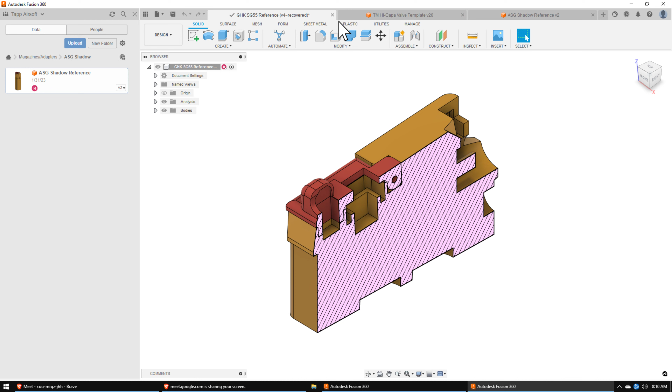Right now, even on a per-project basis, it costs a lot. This way we can work together longer - I'll have the security of being involved longer, and you'll have the convenience of not having to pay as much. I agree, I think it's a really good idea. I'm going to definitely talk with my brother about it.

Okay, great, let's go through this. How about I just model this and talk about it while I turn it into an adapter. Sounds great.

By the way, do you have Fusion or do you use SolidWorks mainly? I mainly use SolidWorks, but I've been tinkering with Fusion since I started working with you. Due to my thesis, I haven't had the chance to properly learn Fusion yet, but I'm thinking of learning it down the line. Maybe if we did this business venture, we could cover a license so you could use Fusion and join our account - we work with a couple of guys that would be great. Having licensing in my country is fairly difficult, we have to go through a number of different vendors to get one. I can work with the hobby license, but I don't think it will be powerful enough. What do you think - is it powerful enough for our line of work? For what you and I will be doing, I think so. We'll have to try it and see, and you just let me know if certain features I'm talking about aren't available down the line, but we can figure that out later.

The first thing I start with is we just have a body, and I like to label these. I use a tool where I format the names so that when they go into the printer, they're easy to read, because I don't get a lot of space. So I usually do the brand, then the mag, and then what type of adapter I'm making. I'm going to make our version, which is called a modular adapter, so I'll name that MA. And you already made these single stack, I believe, so I'm just going to name these ASG Shadow FL.

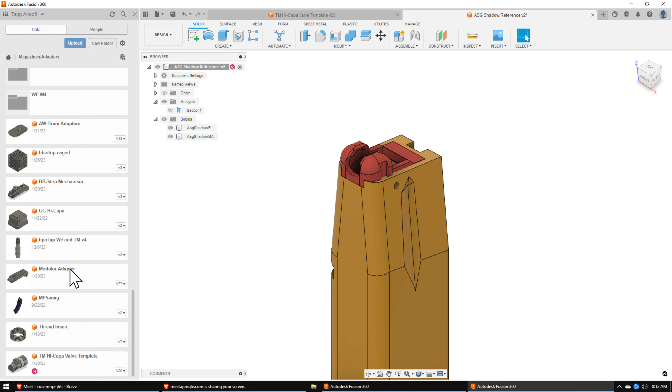This modular base comes from this piece here. Okay, I shouldn't have started with that, let me go chop this model in half. Okay, and now this is the valve template.

I think we talked about that at one point. Yes, and you modeled it already. Yep, I'm constantly updating these things as I realize stuff, like the printer needs change. It's an evolutionary process, going back through these models to update them because some of them are still using the old basis. That sounds like my kind of work too. Yes, it does indeed.

Okay, let's see. So all I'm doing here is inserting that template, and then I'm going to...

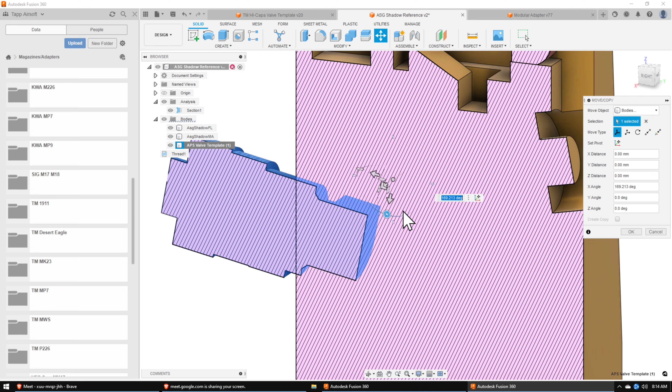Did you take classes on how to model and stuff, or are you self-taught? We did have classes, but our versions of software were fairly old, like we used to learn Pro Engineer 5.0, which is like two decades old software. So I learned SolidWorks and everything else on my own. That's why I'm confident I can learn any software if I put my mind to it. I believe you can too. Yeah, they're also all fairly simple.

So I'm matching the assembly angle, and then I can see that inside it's pretty much inside all the cuts, so then I can cut this out without much issue, and get rid of that little thing.

So there's that template, and then this square here is my output tab, and this is the output tab that you created. So I'm going to bind these two together, bring this up, and then I'm going to loft these. Doesn't that look a lot like this one? Yep, and so then that's my airflow.

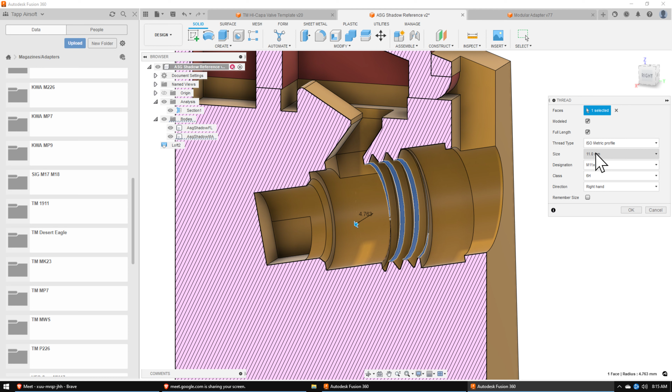And this thread here is 11 by 1. And then we also get rid of this back here. There, okay, so now I see I've got the internals for the magazine, and those are the internals that I want.

So basically, when you said you wanted the little thing on the back, it was mainly for positioning and angle of the template. Correct, and you've done a pretty good job of positioning those very well. Thanks a lot. All right, and so now I'm going to build the expansion chamber because we need a lot of air in here.

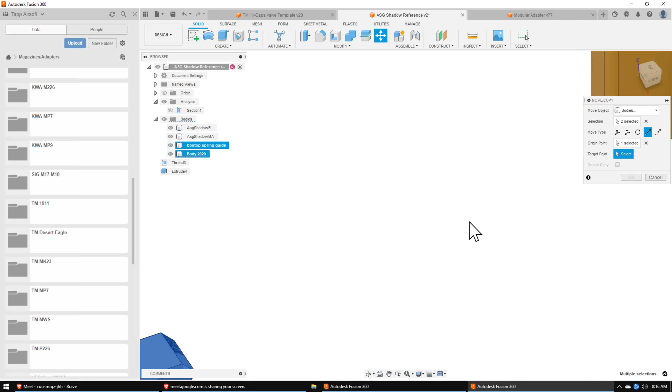So before I build the expansion chamber, I need to build where the BBs go - that's the other aspect of it. I'll take this piece and this piece, copy that, put that in here. These are also custom made for every other mag, they have to fit it. So you have to cut something from this one right now.

One sec, my cat is crying.

Sorry about that, I'm back. Sure, yeah. So as I was saying, I'm pretty much done with my thesis, I just have to present these things. I have the presentation ready as well, so I think I'll be ready not this week, but the next week. I think we can totally start with fusion and everything like that, and then that will give me enough time to talk to my people as well. Yes, exactly, so that will be very helpful, beneficial to both of us if you think about it. Yes, I agree.

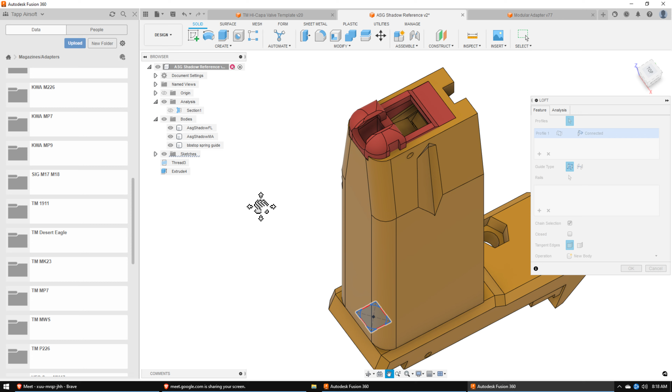Okay, so this piece - that's where the BBs are coming in, and then I'm creating a loft to where the BBs are coming out, and that's that little square that you made. So now we've got the tube that the BBs go through.

Then I like to add in a little piece on the front here - some styling, I guess. Well, it's actually sort of helpful because I'm using it so that I can remove powder on the print.

SLS printing is messy, so this is helpful to have. I like to punch a little bit out so that when we're sandblasting, the sand can get in there and really clean it up. That's beneficial on multiple fronts.

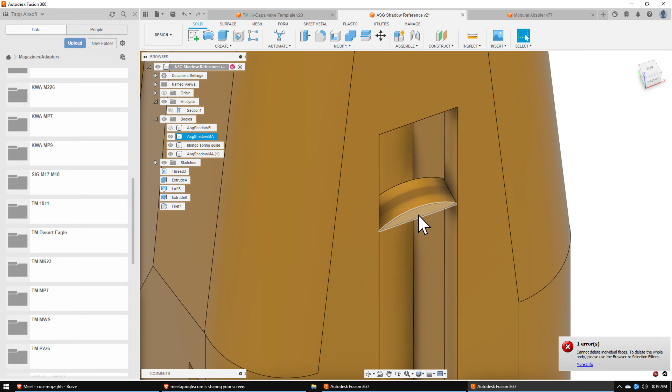I also like to add the fillets. The dimensions aren't super locked in anywhere important - the BBs will just go through it without an issue. It just needs to be at least 6.5, just as long as this space here is less than 6, so that the BBs don't come out the front.

I'm not sure why it's giving me this odd shape here. Whatever, we'll deal with that later. I did notice I'm getting a weird cutout, and that's because this whole piece comes so deep - it's a good thing I saw this. So what I'm going to do is try to shift the whole thing forward.

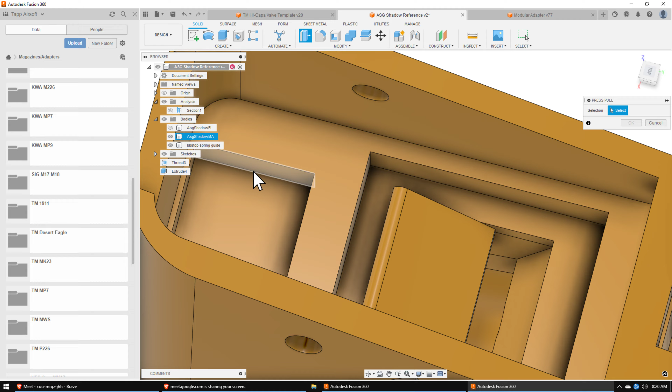Thankfully we can do that because of the way the feed lips are set up. Because we have control over the feed lips, we can control everything else. So you tweak the geometry a little bit - mainly the inside is what we'll mess with a lot, so that we can get what we want.

I also want to say the scans sometimes don't make a lot of sense. Like the recent piece I did - the geometry was basically for mating purposes. The scan was asking for a thinner feature, but this one here was a thicker feature, so I made it suitable for mating instead. That's super helpful, because assembly matters, and scans sometimes create unnecessary issues.

Okay, good, you're already working through that. So I'm going to loft this again.

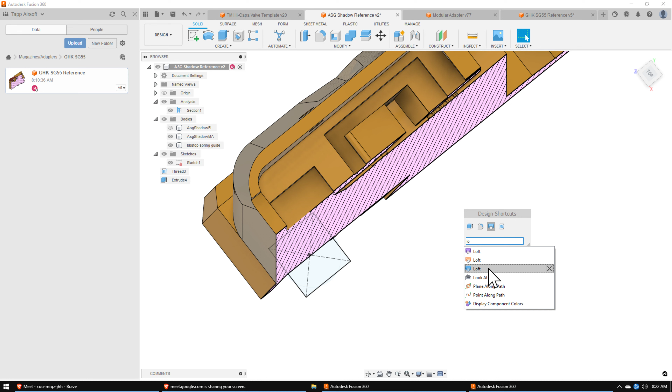I have tried lofting the circle to a square like this down here, but it comes out so much better when I've got a full square going all the way up. A circle is fine, but any other shape creates weird results - the loft guide curves get messy. A squircle gets really messy. I tried a squircle once and it didn't go well.

It looks like we were able to clear this little area here, but that material is so thin that it will mostly just get destroyed in printing. So what I can do to change that is fudge this a little bit, and I'm going to measure that exactly. I'm also going to pull this out so that it still might be too thin, but I'm going to print anyway just to see what I can get away with.

Because we're still testing everything, really. This printer is so new we don't even know what it's fully capable of, what our tolerances can be, and stuff like that.

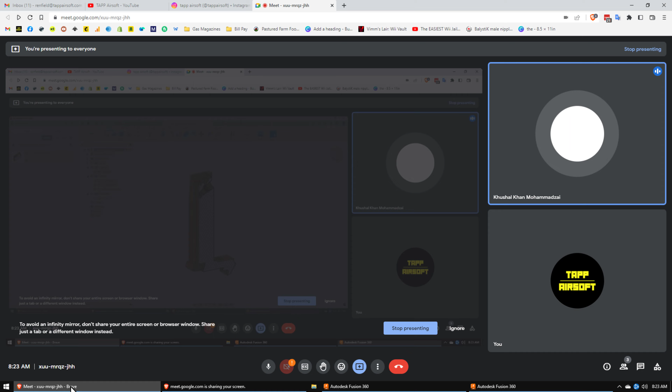What's its minimum layer thickness? I think ours was 0.1 millimeters. But I think it will be lower than that because it's a really expensive printer - it may be 0.05 millimeters, which I think is the standard. I can actually see here - so I don't think it will be an issue to create this thin feature, but it might get some issues during operation.

Let's continue on. I shouldn't be interrupting this much. No, no, it's all good, it's totally fine. Okay, let me see, I've got to find where my...

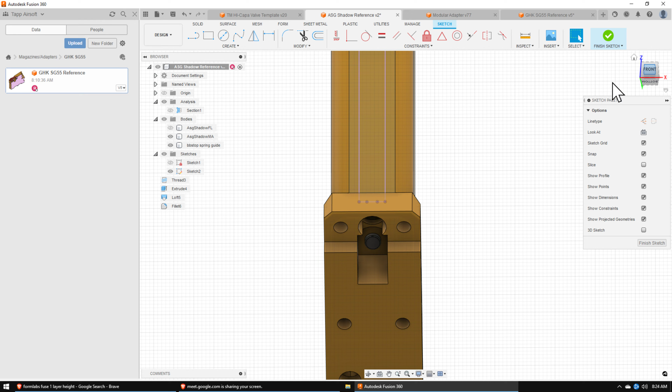Don't need any of that open. Okay, so we're continuing on. We've got the area for the BBs - I just don't have any names for these. Maybe it would be good to create names, but we've got the BB channel, I guess, and then I'm going to create the cutout for it as well.

There should be some kind of rule in terms of measurements so that the BBs don't get caught on anything. On their way out, they should have the least resistance. You already made sure of that by having a square profile and stuff like that.

Okay, so we just put that in. I'd like to chamfer these little ones here because they're the front of the magazine and people see them. Actually, the software I use can't chamfer anything because it's cracked, so some features are missing in it.

I have to get it out of my reverse engineering software and get it into SolidWorks and chamfer stuff there. So switching to Fusion would be helpful, yeah, it would really be helpful.

I think if we hire you, we'll definitely be switching you to Fusion just so it's easier for us to come up and change features. Most likely what will happen is you'll build something like this, and once I'm done building it, I'll be able to print it and go through and tweak all the little minor things.

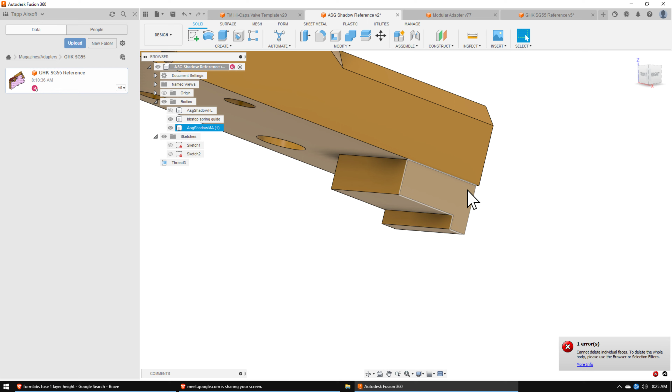Yeah, and I think I'll be able to tweak it. I know these printers and their layer heights and everything, and I think I'll bring a lot to the table that way, able to tweak a lot of stuff. Yes, that's great.

This back portion, you don't have to worry about what I just did there because I'm going to remove that so you don't have to worry about cutting away extra material. Okay, so now let's move on to the expansion chamber.

And the way I'm going to do that is I just grab a flat face. Are you using a 3D mouse by any chance? Nope, I'm not, I'm just using a normal mouse.

The movements are really smooth, I didn't even know there was a 3D mouse. Yeah, there is one though. Maybe I should pick one of those up. Mostly 3D modelers in Blender use it because they need a lot of precision.

Like grabbing this thing and pulling it around? Yes, exactly, doing that would be super helpful. I should definitely look into that.

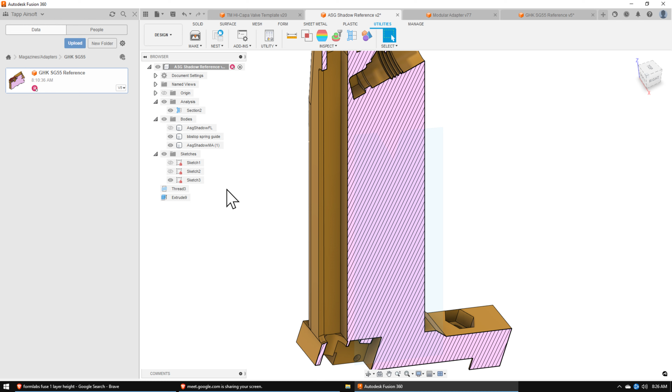Anyway, so I like to put the face on, and I love how you're doing these, they're almost completely flat and perpendicular to the model. That's super helpful, because otherwise it won't be consistent.

So I pull in here to this flat sketch, and then I'm going to create some constraints by just projecting the walls. I'm basically going to start building a box that I'm going to cut out. So I know that I want at least, I think it was...

2 millimeters is nice. And then I'm not sure the exact specs, but as the magazine gets bigger, you want the walls to get thicker. You're talking about the walls of the expansion chamber as you're offsetting these. Yes.

And I like to keep this expansion chamber as big as possible, but the smaller it is, the more durable the end product is. So I'm actually going to do 2.5 just to be on the safe side.

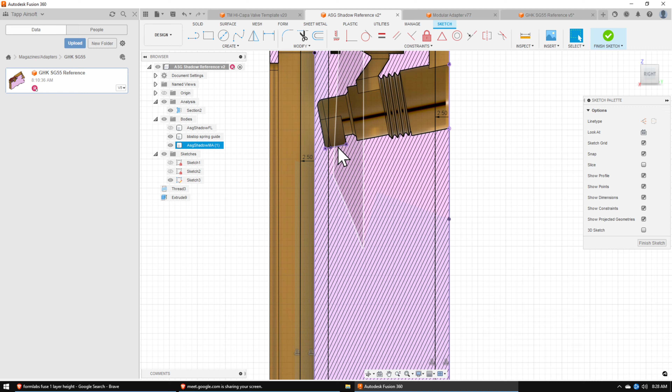And there's going to be some aspects that I'm going to build down here. So I'm going to cut this, and I don't even know where, just choose. This will have to be more exact as I build a better version of this, but I'm going to continue going.

Once I get the basic idea, then we can tweak things. Yeah, it will change piece by piece. So now this is my expansion chamber sketch that I'm ready to cut out.

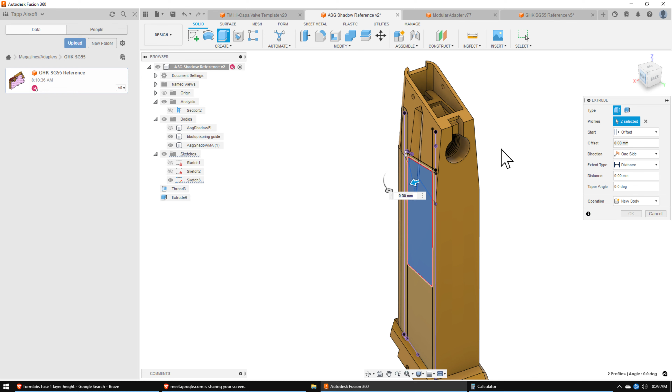We could also do even numbers, like exactly 20 if you want, we could do that as well. I think for the outside of it, it's nice to do what you're doing, but also the closest digit before the decimal point. Okay, that sounds great.

So I'm going to do negative 15.5, and I can double check that. Good, so here my expansion chamber is installed. I'm going to cut this out.

Now fillets are just such an amazing tool. We're definitely gonna get you on Fusion because just adding in a little bit of a fillet increases the strength inside by so much.

Yes, exactly, because the stresses are all reduced. We actually studied these things in engineering - they always advise to do fillets wherever possible.

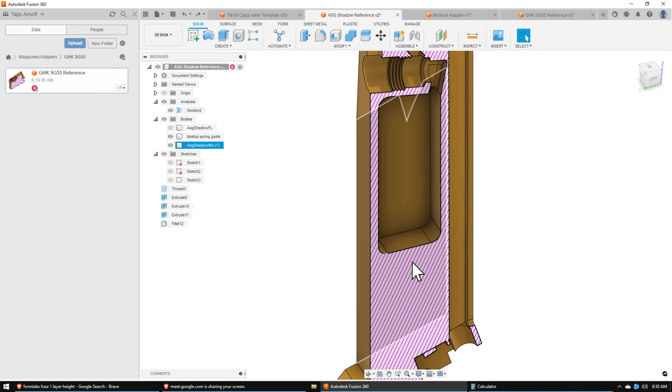That's why I was surprised when you asked me to not do a lot of fillets. Oh yes, on the outside. Yeah, because that isn't as important - all of the operation is happening here, so it's not as important.

Okay, cool, it's coming together. And I'm gonna just add a little fillet right here.

Now these are some other things that maybe you know a little bit more about. If we've got an air chamber here, and we're going to model in a tube that will come up through the middle, air will come up and fill this chamber, and then when the valve gets pressed, air will travel through here and then up through here, and shoot the BB out. It will actually travel through here into the gasket, goes up into the gun's nozzle, and then the nozzle pushes air and pushes the BB out.

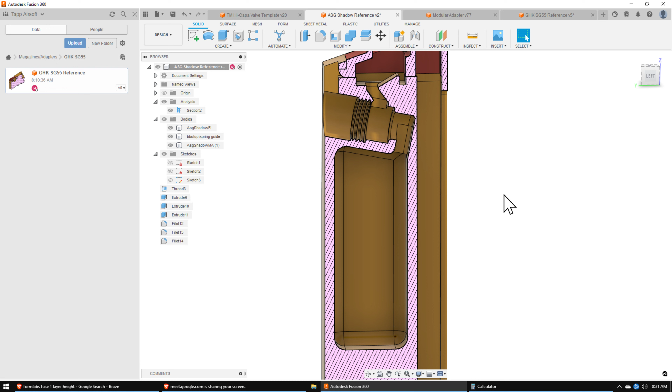I'm gonna show you how an airsoft gun shoots so you'll have a better idea. Yes, I did search that on YouTube, but I didn't find any useful videos on it.

Yeah, it's a little confusing. I figured once I have all of the models, it would be easy to check it. Yes. So let's keep going.

Oh, so that's what I was saying - something like this fillet here is gonna help with, I don't know, maybe it probably helps with directing the airflow so you don't create turbulence in your... Yes, you are right about that. Yes, because a direct jagged entry usually creates turbulence.

And using these smooth lines, what the particles basically do, they stick to the surface here. So they stick, and the very first layer that sticks to it goes very smoothly into the upper chamber. So yeah, fillet is useful here.

Ah okay, I didn't even know any of that. Yeah, it is useful - like in fluid mechanics they did teach this stuff. Oh, so maybe I should even be adding stuff here.

Yeah, that will be better. Now that I know this stuff, I will definitely be tweaking some of it. So I'll create a model and then hopefully pass some air through it once I get enough time, and see how we can make the motion smoother for the air. That's great.

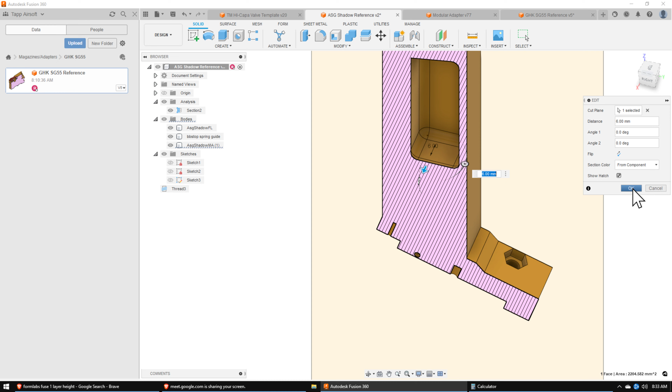Okay, so moving on. Now we're going to add in - I got to get proper dimensions for all this stuff, but it's because I've never taught anybody, so I've just sort of kept it in my head.

No worries, we'll figure it out. By the way, there are proper softwares for this - they model the whole airflow or fluid flow. Whenever I get enough time, I can model airflow through this model and see whichever channels are best, like circular channels versus square channels, to get a really good idea of that. Overall it will be a much smoother operation. I have the ultimate goal of increasing the range of the BB, since that's what matters, so something like that would be super helpful.

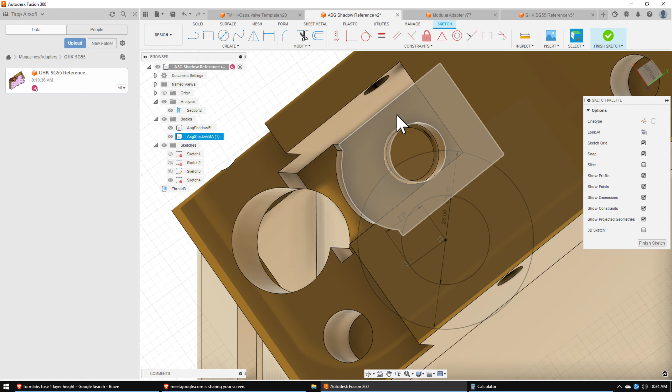All right, so now I'm going to be building the quick disconnect where the tube will connect. That punch gets cut all the way down, but we can't get rid of this little square section here, so I have to move this piece so that it doesn't interfere.

Then I'm going to pull out this hole and offset it by -6, and then pull it all the way through. There, that's where the quick disconnect will screw in, and then I can put this back here.

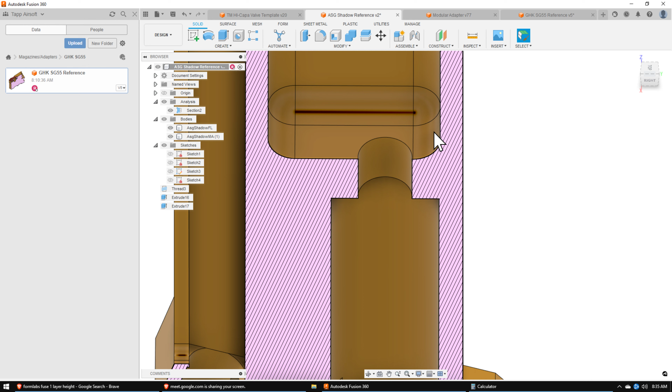So what you meant by it not going through earlier - it basically shouldn't disturb the geometry of the button. Correct. Because this button, there's a spring in between that button and this device right here.

Let me show you how this works really quick. So what's going on here is the BBs flow this way, go up from the pressure of the spring, and then the magazine hits this section right here, which causes this to rotate and gets pushed up like this. There's a spring in between this button and this nub, trying to push it back down. This activates the whole airflow mechanism, I guess.

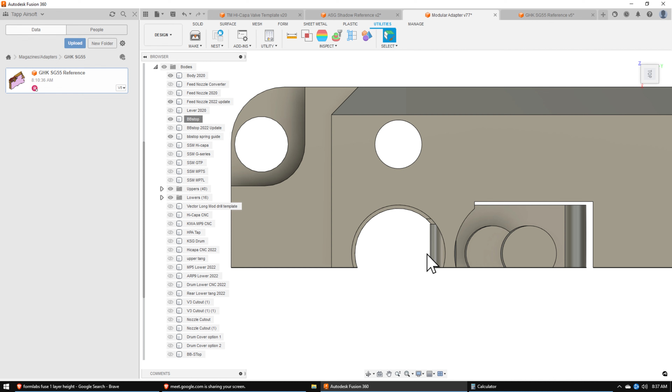We call this a BB stop - it pushes the BB up, and then the BBs can flow freely. When you remove the magazine, this spring pushes this back down, and then this little nub gets in the way, so that way all the BBs don't just fall back out. So we like to keep that feature, it's called a BB stop.

Okay, so I'm going to finish modeling this section here. I like to cut out a lot of the back side of the magazine so I can see all of that. One more question - you've made a smaller hole over there, could I see it one more time, this one here?

So what's this, is it for building up pressure or something? I'm going to show you - so it's actually just a thread, because this is where the quick disconnect... the quick disconnect is another component of this, and then the HPA airline will connect to that quick disconnect.

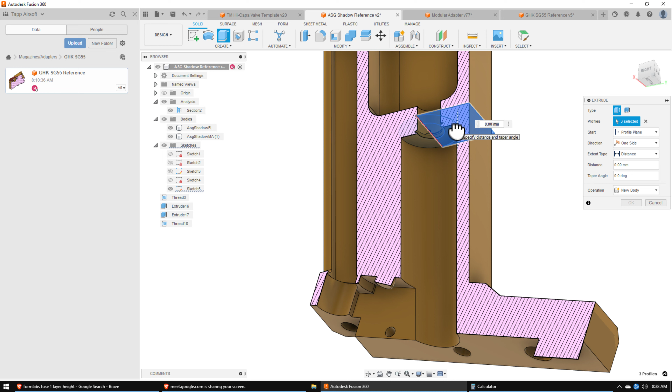This is going to be modeled as 6 millimeters, and then this is an M6 screw. I like to only include about 1 millimeter worth of thread so that it gets the screw started, and then the rest of it grabs into the material. Then I'm going to cut away the rear so I can see everything and clean it nicely, because this wall on the rear, you only need a little bit - it's not super important unless there's a special aspect. Let me find an example - MP9.

Here's the MP9 modular adapter. I've already built every feature, the expansion chamber, the cutout.

Here's the center channel, this is where we set things up, where the connection to the case goes. The connection goes right there, and then a hose will go right out the back of this hole.

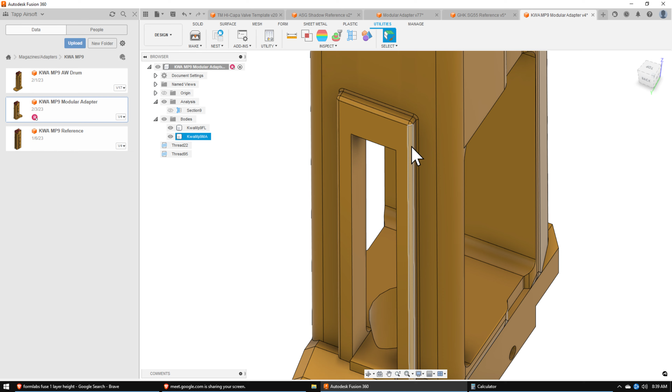But you see how this one has this additional small square here? That helps the magazine line up in the gun. So I do need to keep it, otherwise I would have just removed all of this and made this hole bigger, but I can't because I need that.

But this one that we're working on here doesn't have anything like that on the back. The back is just completely flat. So in this case, this is what helps align it.

Do you have some models of wherever these specific mags go, like the mating between this mag and the gun? If I could get an idea of that, I will keep important features like these. I didn't know if this was for style purposes or if it was actually useful, but I modeled it and didn't know about it.

Yeah, it's hard to say because each one is so individual. That's why every single one of these is a different model.

So some of them have it, like this King Arms one that you just made. So this King Arms one, we didn't put a modular adapter on the bottom. Instead, what this is, it uses just MP5 mags. So it's not modular, meaning we can take it and use MP5 mags, M4.

Let me show you on our website. So if I go to adapters, pistol adapters.

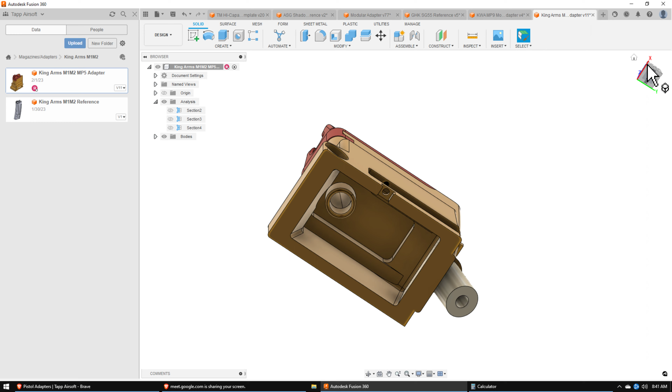In the case of this King Arms one, because otherwise we would have had to put something this big, and that's as big as the magazine. It uses up so much space if we were to try to see this huge tail. We can't have that.

So this would be a similar setup. We've got where the airline, oh, this is the quick disconnect right here. So it's connected right here. This is just a rough model that I have, but this hole here on this side is bigger and an airline goes in there.

Here's the expansion chamber, here's the blow back valve, here's where the BBs go. So it's all pretty similar.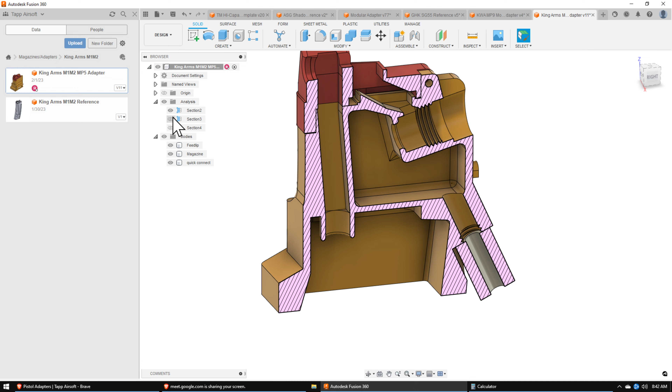Now, maybe you can figure this out down the line. There's nothing here, there's no space right here for a BB stop mechanism. See how thin this wall is? It will go right into the expansion chamber. And the reason why we can't make the expansion chamber smaller is because this whole model is already so small, so we need as much space as possible for this expansion chamber.

And it is all very tightly integrated. I don't think there's a lot of space, only so much space.

So what do you do with this? How do you stop these BBs then? Right now, what mechanism do you have? I don't have any mechanism.

Let me show you something I've been prototyping. Here's another one, but this one's a little different because we modeled it around CNCing it. You can see here, still all the same mechanics, expansion chamber, threads, but now this can be shoved in on the side of the model with a little quick disconnect.

But we still got the same features of the mag release, and this is what we usually call the nozzle. This one has the same nozzle. And there's that thing you were talking about, the BB stopper, I think. Yes, here's the additional component.

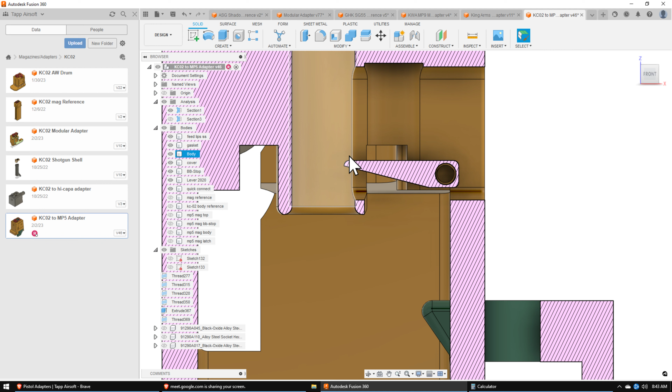That's something I've been working on here, a little BB stop that goes from the side. So when the magazine comes up, it makes that little tail lift. But the problem is this part is so small, I can't really 3D print it to be accurate.

I want to CNC it, but my CNC guy is working on other projects. I don't want to interrupt him like that. So it would be nice to be able to 3D print it and not have to rely too much on him.

So like for instance, the CNC thing, this is the expansion chamber in here, and although the airflow will be disturbed here because the whole mechanism is different.

So this one we've built a gasket, and then we put this cover on and screw it in, and that gives us a nice big air chamber in here for such a small part.

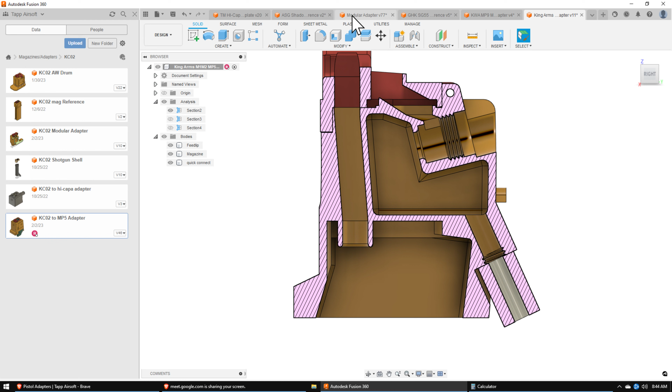But we have to figure out the mechanics of the smaller parts, and you'll sort of be using intuition to get this stuff to fit. I do love this stuff, like solving all the design challenges. It's like an advanced puzzle, very interesting. I think we'll keep working on this.

But the modular version is much easier because you're just slapping something on the bottom of it.

Understood. So I've got this thread here, and then I'm going to put an area for the feed tube to go. I'm just going to chop this area out, 9 millimeters, and then pull this here, new body, and rotate this.

So that it's sort of in the opening there, and then you can just cut it out. So now that's where the airline goes. It goes up in there, screws into the quick disconnect, and I like to open this up as much as it will allow me.

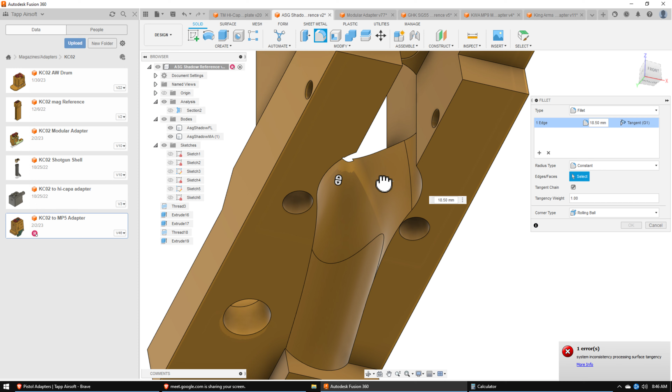I think I just now get why you're subtracting the features from behind of this, because you want it to be easily accessible by fingers so it can properly connect. And also one of the main things is powder, we want to be able to reach in there and clean out the powder.

Where if this one wasn't cut out and was just a hole going in this way, it would be very hard to get that deep in there with like a tool.

So one more feature that we add to the expansion chamber that I forgot, let me add it real quick, is we like to put a little screw on the back so that we can reach in this huge expansion chamber with like a dental pick, and then clean out the powder and loosen up the powder in there.

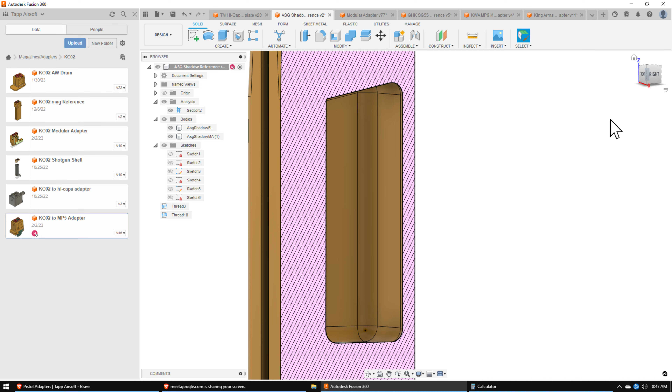You keep mentioning powder. What powder are we talking about here? The powder from the SLS print, the plastic. Yes, that is a huge issue, because this would all be completely filled, and it needs to be loosened up and shaken around so that you can get the powder out of this internal crevice.

And you also have to make sure that after the powder is removed, it has to be airtight and stuff like that. So yeah, that's why this thing.

So I build a little piece here, and it's an M4 screw. So I go 3.4, and it threads pretty nicely at that. I've already tested different thicknesses for there.

Then I build where the head will go. So I offset this, it's like 2.5 millimeters. The head is, so that looks about right, so that the head of the screw can fit in there, and everything is airtight.

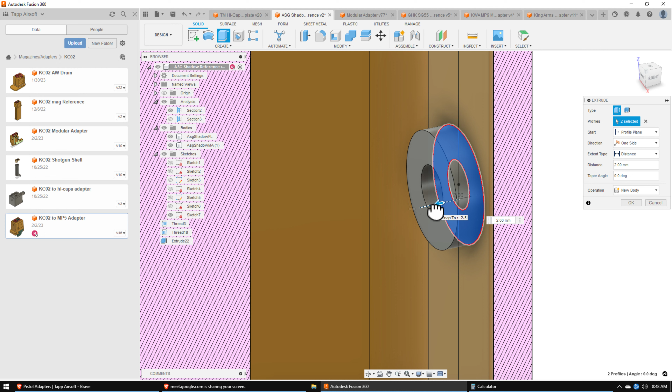Then I have to build an internal wall, other than this part. So I do 4 to 5 millimeters worth of thread for it to catch. And then we need to make this actually a little bit bigger, and then I can combine that there.

And that's what the dental pick will go into. So we just put the dental pick in and we spin it around, shake it around in there, and that will loosen up, well, not all of it, but it at least gets the powder sort of moving in there. And then we have an air compressor nozzle that we put into each of these holes, and hopefully it can come out easily.

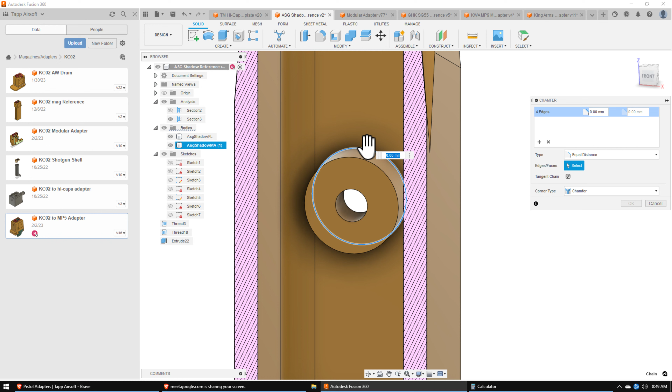So basically you just need this to loosen it up a little. If I didn't have to put in this hole, if there was another way, I would definitely do it. I have tried a bigger hole, like an M10 screw, but the material doesn't like it, and it pops, kind of snaps, it doesn't thread into it nicely. Yeah, that won't work then.

Maybe I should test with bigger screws, because that will be much easier to reach in quicker. But right now this is an M4 screw, and the M10 is too big, so I still have to test with all those ones in between. Maybe an M8 screw will be nice, but I just don't have time.

A lot of these projects that we're making, we're aggressive. As soon as we got this 3D printer and realized that this process would work, we stopped buying magazines, because you can see on our website it's actually a magazine from another company, and then we just put our little piece. But now we're 3D printing the whole magazine, so we stopped buying this actual magazine here.

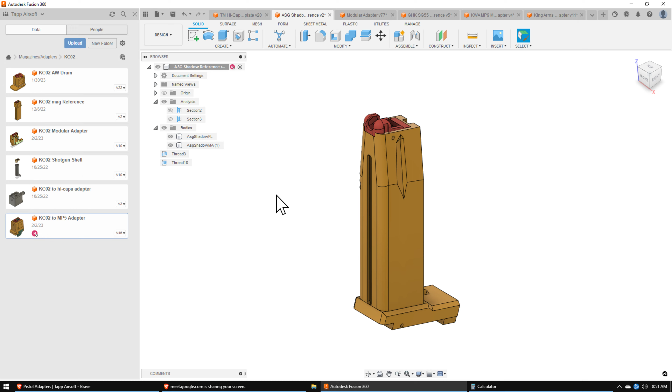The problem is people are still buying this stuff, so we have to be quick on pumping out the adapters that we're already selling. Like this one is good because people buy this adapter, but we don't have any magazines. Then they already have an adapter and they come to you for the other mechanism, your invention and stuff. Yeah, they already have the gun and they want this adapter here.

Okay, we've pretty much built almost everything for this except the feed lips. And the feed lips are pretty simple. Now we could keep the feed lips the same, like this, just print this feed lip like this, and then you've already got a nice square going in there, and it feeds up nicely.

But the problem is feed lips break easily, they need a lot of support around them. So some things that I like to do is, like this face here, I actually want to be part of the feed lip, not part of the magazine. So I would pull this out, get all this together here, and then remove it.

To give as much strength to the feed lip as possible... the mag wall will get thinner though. Oops, I lost my feed lip. The wall of the mag will get thinner, but it's already in there, so it shouldn't matter.

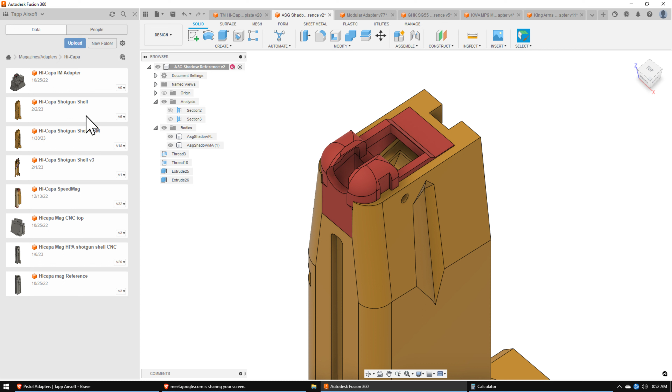Let me show you how I've had great success with some of these. With the 3D printer, you can customize almost all of these, and they'll be better—you have more control over everything. It's super helpful.

So we've got this one, which is the reference for one of the magazines, and you can see the feed lip—that's the stock feed lip. That's what it looks like.

We might even rescan these magazines, because this was done by someone who measured it—I paid someone to just measure it, not even scan it. So we might have to rescan some of the old magazines I have. It won't be as tight as when we usually do scans instead of manual measurements.

So this is what the feed lip is now. We've chopped up—you can see the original magazine goes, that's the original magazine, and then the feed lip is taken over by a lot of the components. So it fits like Legos in there.

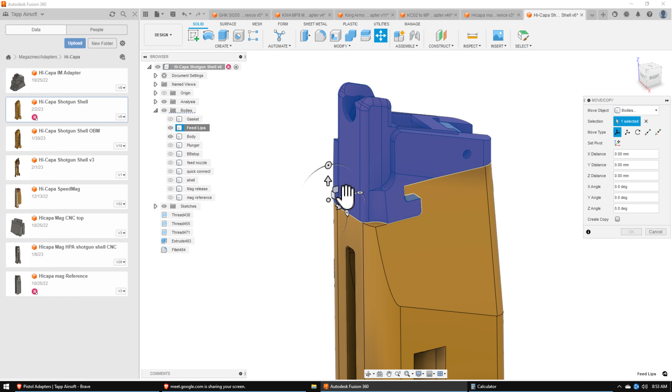This feature here is what I really love—you can just slide the feed lip on. This wasn't part of the original design; I haven't made one of these mags like that before, because all of those features I remake. Eventually it would be nice to remake all of that, and that would be this.

We use a little pin in the back here to secure it, to stop the feed lip from moving, but really it's these teeth here that are keeping the whole feed lip down onto the adapter. It's properly mounted onto there.

The reason we have it as a different part is because if they drop the adapter, these little teeth up here will crack the actual feed lip part, and we can't make those wider or anything—they have to be like that.

But if they crack it, they have to buy another one. So that's good business. You have to—that's better as well. Keep them consuming. We can't make the thing too good.

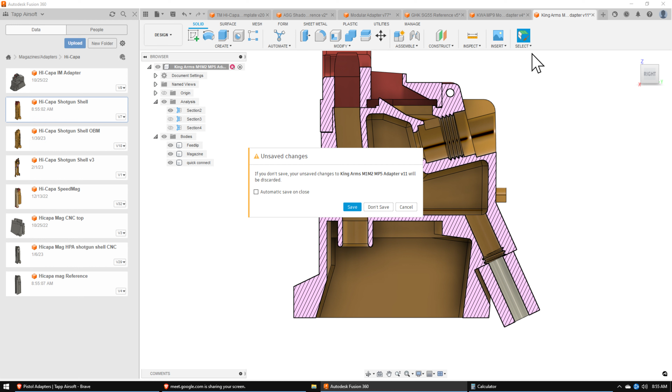Doing fluid mechanics with this will be really helpful. I think people that have made these have already done all of those engineering projects on this, but if we could improve it even a little bit, it would be great. We haven't done any fluid mechanics for any of this stuff—I just created a box. Whenever I get time, I'll get to it.

So it gets more pressure—feed lips are the last part of this project. I'm going to basically just chop off the top of the magazine wherever it's possible. So I'm actually just going to split this magazine right here.

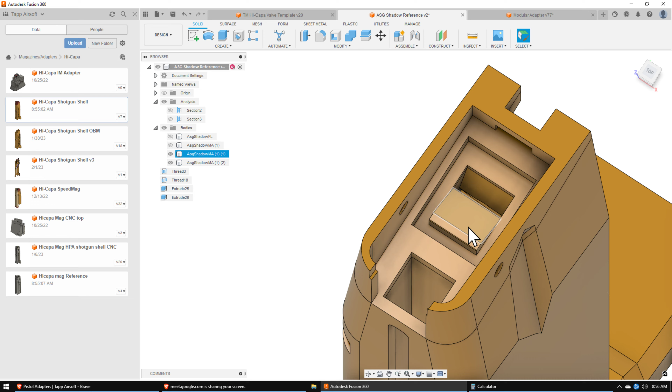So split it here, and that little peak there—we want to keep part of this, so I'm going to add that back to that model. Oops, I might have messed up. Let me see here. Okay, good. So now we've got these two pieces, and that can actually become one piece.

So now all of that is the feed lip. But how will the connection be achieved between this one and the mag? How do you calculate that? I go through and get rid of all these features—oh, that's why you don't like the fillets here. Okay, understood.

Okay, so clean up all these things.

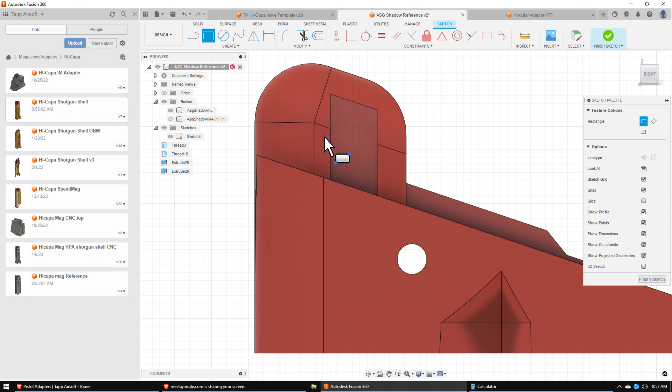This feature here is something to be aware of. We do want to keep this face, and we even want to make it a little bit bigger so that there's no chance of interference, because there's a mechanic in the airsoft gun where if it runs out of ammo, there's a bar that gets pushed up and that stops the slide from moving, telling it that it's out of ammo. But for us, we don't take advantage of that feature right now. Maybe down the line we can, so we just make sure that mechanic on the gun is available.

So it doesn't have the choice of it working, but we also like to remove a lot of the material so that it doesn't touch it, so it doesn't activate on accident. So we actually open that up a little bit, and then we know it's not going to touch it. There's a lot of space.

And then I'm going to cut, now you're going to build an interface between these two so it can... I'm going to take a look at the sides of this, and I can see on either side of it we've got a lot of material to work with, so that's good. Either side of this feed lip, and even way back here, we still got a lot of material.

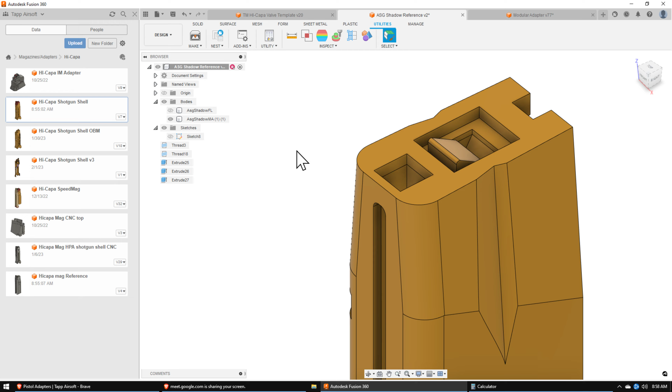We're not really getting into the air chamber area. You can see from here to here, there's just tons of space here. So we can use that for the interface then.

So I'm going to project here, and I do everything for this part in 3 millimeters. So I'm basically just going to be creating some 3 millimeter boxes down here. We can actually go a little bit larger - what do we have here? Four. Great, so this will be the beginning of our teeth.

And actually, I just want to check on what I did here to be sure. Oh, that looks really good. 3.7.

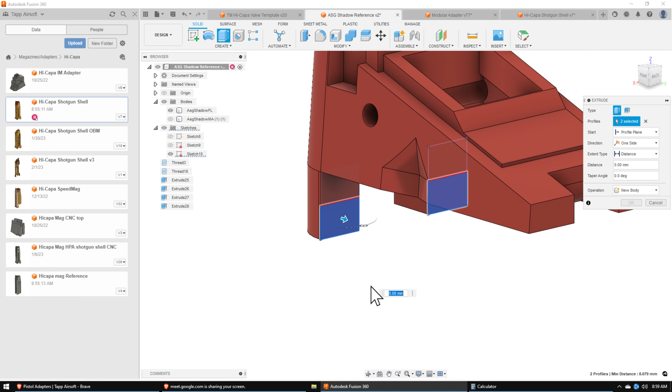So we'll take, actually we'll take 6, and then we'll chop our 3 out. And then we'll chop our 3 out this way. And then we remove that from this file. So I'm going to cut it out, keep tools, chop it out, and then delete these spaces.

Like that. Yes, the interface is nice - there we have it sliding in there.

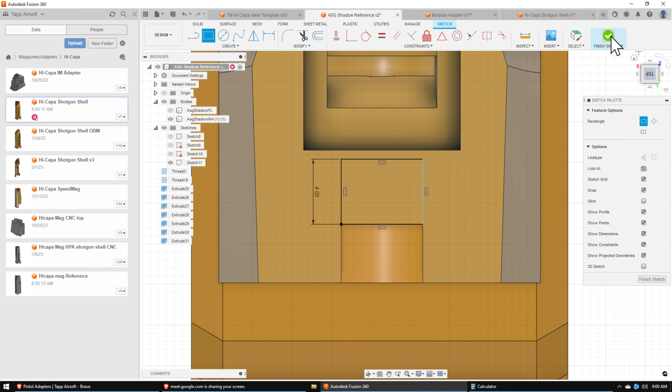Great, and now we're not using this pin here anymore, so I'm going to remove that feature. And then now all we need is a little pin on the rear to hold this all in place. So I'm going to create a little post here, and the pin is 2 millimeters by 2 millimeters, so a little bit bigger than that is nice - probably 4 will be... it's actually like a square profile.

I don't know why, Fusion recently messed up something where when you create a sketch plane on something, it sends you back to the origin. I've got to move it every single time in the latest version - it's a bug that they have that I hope they fix soon.

Fusion looks better, by the way, like creating things without using that much effort. I think they've designed this stuff pretty good, it's very intuitive. Yes, it is very intuitive compared to SolidWorks - SolidWorks makes you go and do everything manually. So this is rather intuitive. I will have to eventually get into it because it has some other features as well, like that one feature where you can do blender type of modeling - in lofting? No, there's this other feature, it's the form tab. Have you used the form tab yet? Oh no, I haven't. Yeah, so that can make like blender - we basically use it to create freeform 3D models.

The other one, the form one, Form. Fusion has implemented this as well, and it's very cool. We have more projects that we want to get into.

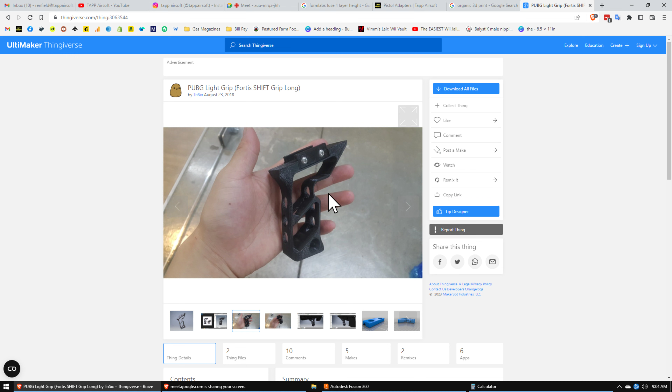And this, you see this thing here, the people on Thingiverse, they make most of their stuff on Blender, and Blender uses freeform 3D modeling, and just having the option of that in Fusion, I think it's really great.

In SolidWorks we don't have that option, so I will have to switch it to Fusion. SolidWorks has to get their game together, they're used for industrial applications.

And they can handle pretty large assemblies, they're known for that kind of stuff, so they have their perks, they have their target audience.

So those are mostly industrial designers. Okay, so it looks like this model is done, almost. So now the feed lip is set up.

We can just pull it right out. There's not really anything that's interacting. There's a little bump here for where the gasket will go, so that will just line up already right there.

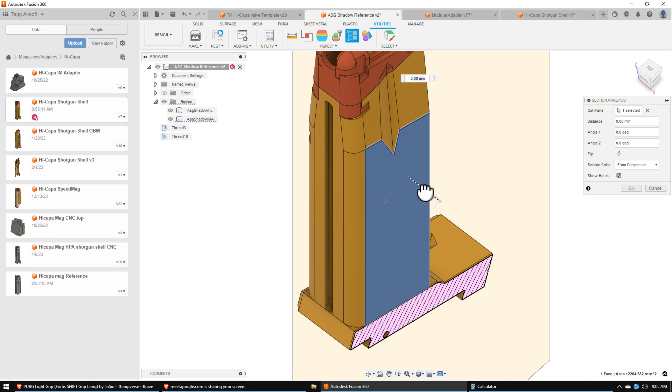And then I'm just going to double check, make sure I didn't miss anything inside. We do have that thin wall over there. I hope that's not an issue. Yeah, this looks like a problem.

See, now we have a lot of space on the front here. So we can, if there was a way, we could probably go down to 1 millimeter there and still feel all right.

Maybe if we could create, if the BBs came up and then just sort of went out 1 more millimeter, so you don't even see it, and it doesn't affect the flow of the BBs, but now we've got more material here. Those would be features that would finish out an adapter like this.

You would hit every single dot. So have you tested something like this? Like it doesn't affect the flow of the BB that much?

No, like this shotgun shell, you can see, where is it, the flow of the BBs actually takes like this huge curve here. Wow, yeah.

You do want to make it sort of gradual, but yeah, so you have a smooth motion. Yeah, we do stuff like that all the time.

I think like this GHK G5 drum adapter, I think I haven't made this one. No, so that one we have it coming in from here and swooping way over there.

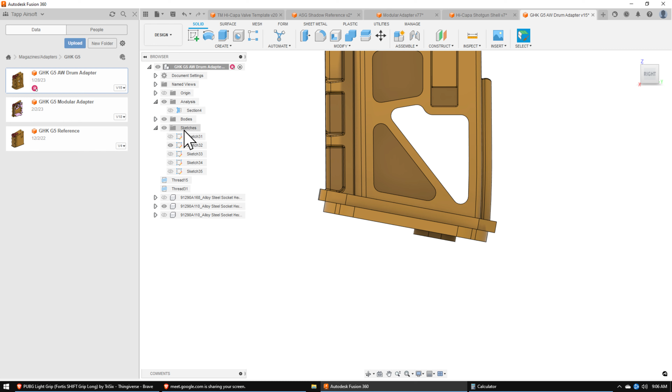We don't worry too much about what's underneath these, because what's underneath has a whole spring mechanism that pushes the BB up. It shouldn't have much of an issue navigating through these pathways, as long as we don't have any hard stops anywhere. If the BBs can move around nicely, then it's fine.

Sometimes companies use something like an LMG setup. No, that's like a proper gun. Let me see, there's... oh here - the BBs actually go through this little flexible spring, so the BBs are in here, and then you've got a winding mechanism that pushes the BBs up, and this little thing you can move around and place where you want. So we're just creating a hard version of that, and it shouldn't have an issue in there.

So here's what the model looks like. I'm going to print that, final print model, and then we're gonna see how it works out.

Now for something like this huge cavity here, we cut that out to save material - there's nothing going on there, it's not needed, so we can cut that out.

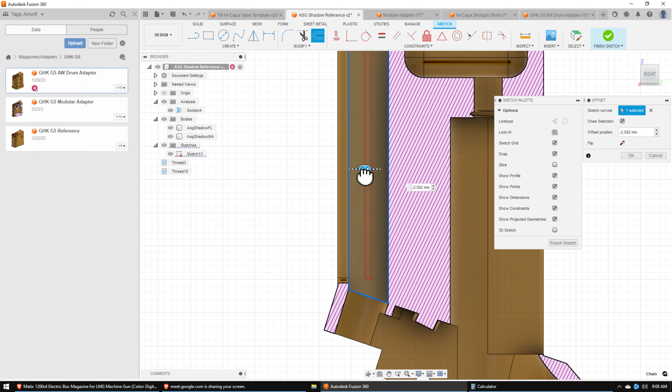And then other things we want to be able to access - I was even thinking of adding in, it would be nice to have more openings, but just a little bit smaller, on the sides of this feed tube, because I'm finding it's nicer to be able to access there and get in. So access, and also for aesthetic reasons it looks nicer, and it's cleaner to clean out - that's the important bit.

Like that - but actually, I don't want to do that because it's running into this section here. So maybe later I'll try that. But we'll figure it out.

And so right now the main thing that we're running into that I haven't been able to solve is three things. The first one is powder removal. Right now I'm just chopping it up, creating as many openings as possible so that we can clean powder out easily. It would even be nice - I'm gonna put one here.

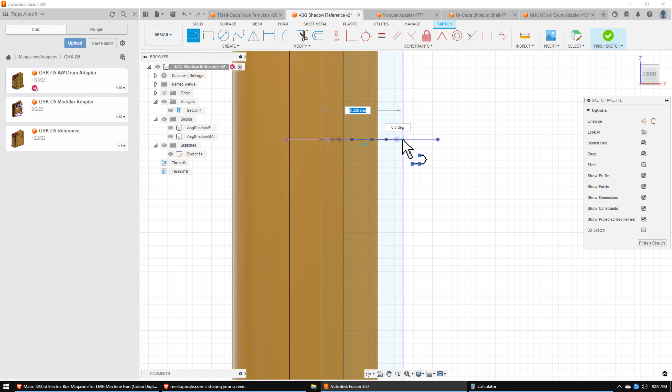Because the BB's not gonna go through here if I make it small enough. So what is this? Still 6.5, so I'll go over 2.5, or over 2 - and then cut this out. So that will go through. It can probably be bigger than that, but just so we have even more access for powder cleaning.

Access to clean powder out. And then the biggest problem is this chamber here is where we need access to clean that - that does seem like a huge problem. So maybe we can put... basically you need some mechanism to open this and clean it out, and then create an airtight seal again.

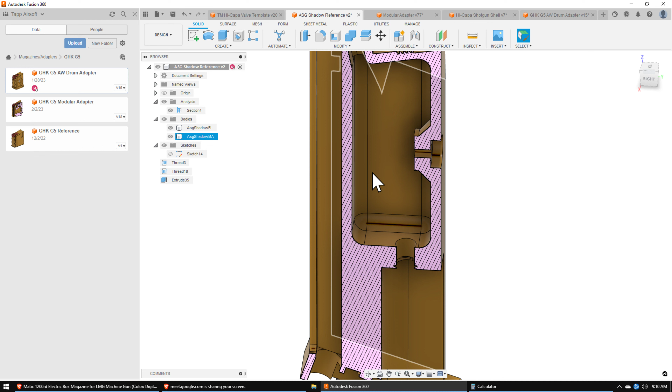We were even thinking maybe this form function can come in nicely, because it's called a sacrifice part. You would print a spindly thing that would go up in here, and it would come out, and then you could just grab it and pull it out, and that would loosen up all the powder and pull a lot of powder out with it. That does sound like a form thing.

The problem is this hole is only 6 millimeters large, so I don't have that much room. I don't want the part that we print in there to fuse to the walls and then create more of an issue. So I haven't tested anything like that, but I have to - hopefully we'll figure it out together.

That sounds like a lot of interesting problems to tackle. And I'm also prototyping constantly, so if you come up with something that you think might fix this problem, let's model it.

We can make it into something and then print it, and we can test it, see how it works, see we can work with it. That sounds great because we're having a 3D printer. That's a huge advantage. We can constantly prototype things and test everything out.

So then I would just save these, ASG shadow FL and ASG shadow, save them as meshes, ASG shadow modular adapter, and then as STL files.

And it's good that we're prototyping so much because we need to be increasing our product line so that more people buy stuff so that all of us can make money. That is the ultimate goal.

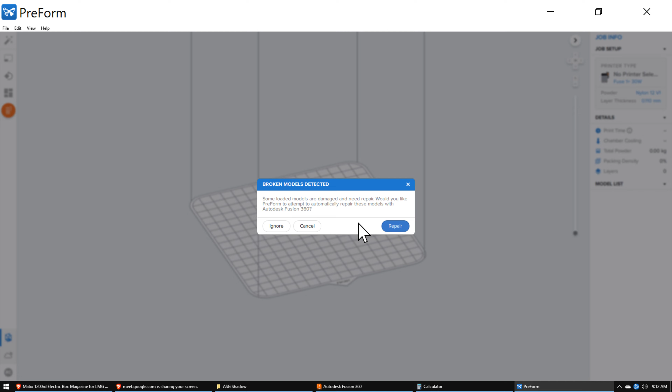So ASG shadow, these both would go in here. I like to build up the layer height because it prints from the bottom up, and it will always fill all of the bed with powder. So it's better to pack it as tight as possible, and have as many components in there as possible. And then, because of the print time, we like to try to keep it to one layer's worth of products we put in here.

What do you mean by that, like one layer's worth of what? Like multiple of these, because of SLS printing. And what we want to get to is this thing called packing density.

We want it to really be 30% or higher. So 30% of the powder will be sintered, will be lasered into actual product. And then the rest of the powder we reclaim through the other tool.

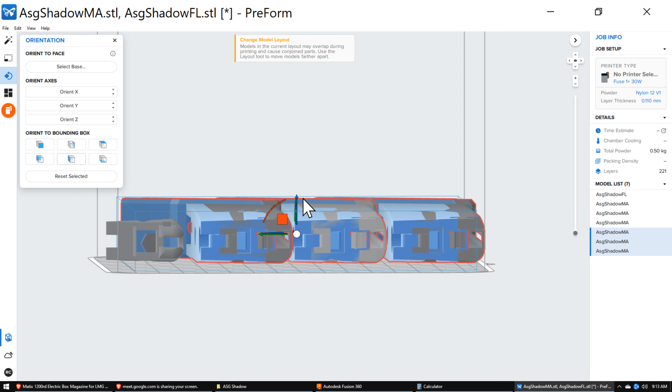But if we get into big enough prints, we could do 2 layers, and that would be like a print that I would run overnight.

How much time does an SLS printer take to make a single one of these? Let's say to make this 1 layer. It will be pretty much the same time whether we had all 3 of these in here, or if we just had one.

Because it's still printing - it has to lay all of the powder on each layer. The laser is really fast, it doesn't require a lot of time. It's only the powder thing.

What requires time is the machine that goes back and forth and lays another layer, and then this part moves - there's other things that require more time, like heating. It has to heat the whole printer, and so it's going to take the same amount of time to heat it, whether or not how many prints we've got in here.

So I think that 1 layer takes us an average of 5 hours when it's in the printer, and then an additional 5 hours to cool. SLS printers require you to wait another 5 hours for cooling.

Because if we take it out too quickly, then it cools too quickly and it shrinks - that is a mechanical property.

So what material are you making these out of? Right now we use Formlabs material, which is PA11... Nylon, I think PA12, yeah, nylon PA12.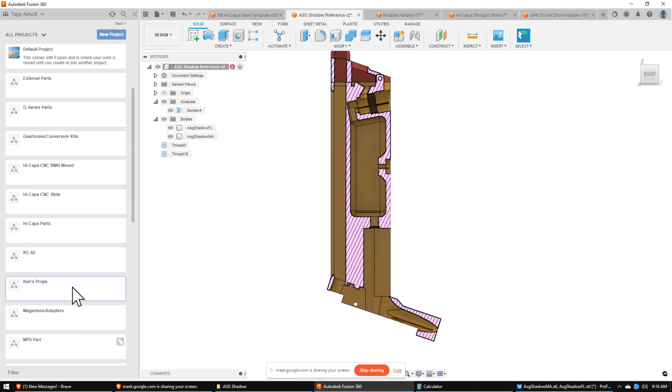So we have, let me see here. What are your future plans with this thing? Do you want to expand your product line even further into hopefully making the whole thing?

Yes, let me find out where it is. I think it's under Hi-Capa Parts.

So here, like we have the whole grip, and this has to be redone. We need to rescan this and get it back as better accuracy. So we've got so many things to 3D scan that we need to get rescanned, and we're working on making our own slides.

I was talking about these things. If you want to make the whole thing, that would be really cool, and we want to. People already 3D print this stuff, and we 3D print it and sell, but we have to use MJF because the elongation at break is much stronger.

Right now the elongation at break for our powder is 11%, and I think HP MJF is 25%.

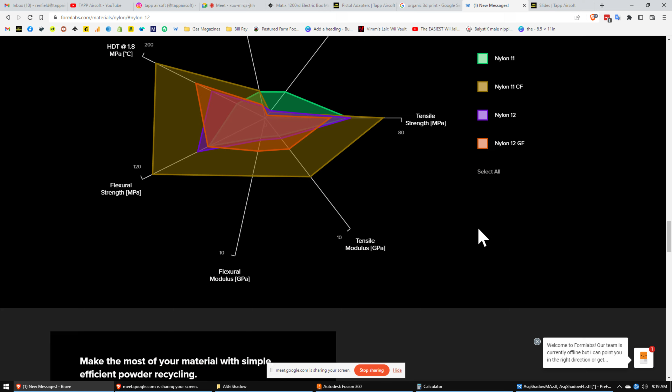I want to test this material, but the problem is I'm not sure — if it has too much flexion, then these two rails will start to spread apart, separate from each other, and this will jump off the rail. That would create issues during operation if the materials aren't up to par. So that goes on that rail there.

These mechanisms are what I'm talking about. I'm very interested in everything design related. Yeah, that's another whole side of the business that we have the opportunity to explore.

We can actually, like this grip here — if we could get this grip with a whole face that isn't completely needed, maybe not that large of a hole, but a little bit smaller than that, and then had an organic thing in there going on — that's where the form meets the functionality of the fusion comes in. I'll definitely be looking into that as well. That sounds really fun.

This is the grip right now that we sell, and it has 3 pieces.

There's evike.com, like the Walmart of Airsoft. They sell everything, and they're constantly adding more stuff. This stuff comes in by the day. Oh, it looks like they added our GoPro mount, so that's great. People will buy that.

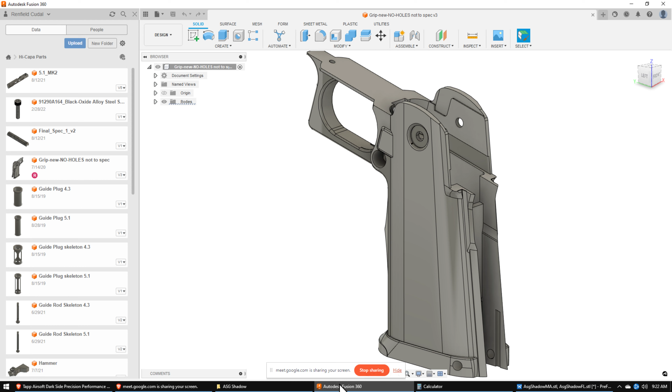I guess ergonomic design, like styling. Yeah, like we put in these, they're called serrations, so that your finger grips on that. And we sell one CNC'd slide right now that we cut ourselves. We buy a stock slide and then we cut it out, and that is here.

Where does he have that? Here, that's actually what I'm talking about.

If I get attached to Tapp Airsoft, then we can look at all of this in a more open nature, because I won't have other responsibilities. I think that would be great. I'm going to actually talk with my brother Renfield about that today. Let me know then.

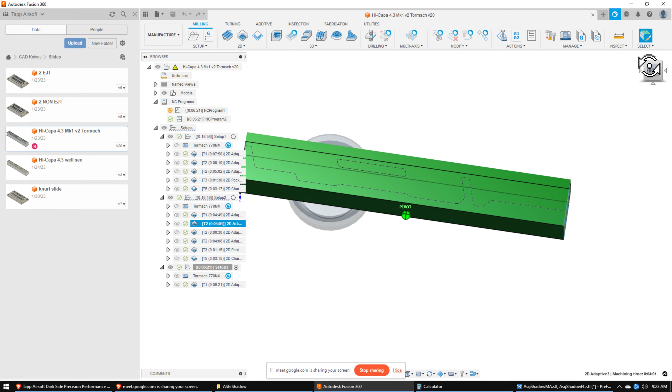The other aspect of our business is one of our friends has a CNC machine in his backyard, and he does all the CAD work for the ergonomics stuff. He does all the machining.

I actually use another... I have also learned this thing. I have a certificate in this thing. Oh, CNC machining, okay, very good.

So maybe if you can familiarize yourself with our machine and all of our tooling, and also Fusion, because we use different software, Power Mill I think. And right now we have a cloud set up for all of our tools.

I don't touch any of this too much, so someone can work remotely on this as well. That sounds great. Right now Grant, our friend Grant, likes to do all this work himself, so that he's more aware of what tool is being used and all that stuff.

Maybe down the line we could, but obviously it's his machine. Well, it's our machine, it's TAPP Airsoft's machine, and he works for us. Understood, understood.

The reason why we focus so much on the adapters is because that's our main form of income. We get the most amount of money from making these adapters because we can 3D print them, like that adapter I just made. I scanned it, turned it into a CAD, modeled it, and then we'll print this piece, and it will cost us maybe $10 to print.

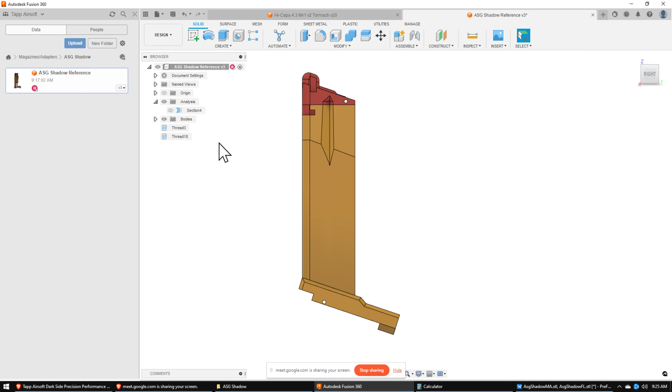So if I get involved in your company, I know my future will be secure because you're making good profits. Yeah, we want to, and all of us want to make more money, so it's good to surround yourself around people that want to do the same thing. Exactly, capitalism.

And your work has already just been super helpful. Thanks a lot. How is the price right now? Is that a reasonable thing? Because I'm gonna start thinking about how much we can afford to pay you weekly and stuff like that. Yes, it is reasonable because it's really reasonable to me.

I have my wedding coming up as well, so the money you send me does a lot of good in my life. These prices, I'm very happy with them right now. And I like how you're so reasonable on things like this, that encourages me to want to send you more stuff like that.

Obviously it didn't take a lot of time for me, I think an hour it took for each of these. That's great. So something like that, I was already able to print it, but I still have to check - oh, maybe it's not in here.

And you have sent me those other things as well. I haven't gotten to them yet, but hopefully once everything else is over I will get to those and realize those two better things - it's really the outside of the model and those holes that we mentioned are important.

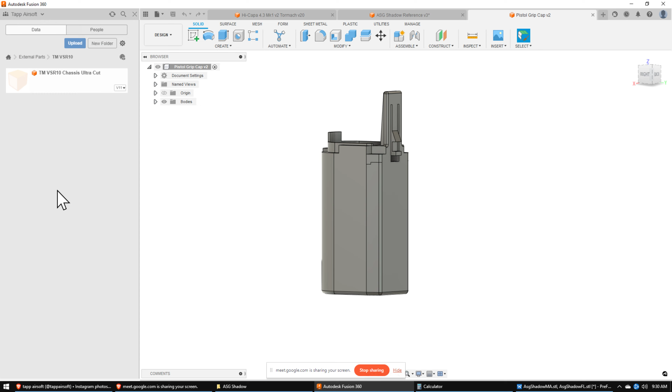We 3D print the whole chassis for a sniper rifle. That's a big project. I had to make this - it's an old one, but I remodeled it so it would fit within our printer.

So each piece has to have a minimum size vertically, and I interfaced it with specific bolts and a specific cutout so that piece actually fits into this one. It's called packing - so they all pack really close together and nicely. We're designing around our production.

That sounds great. Once I'm more involved with this, I can also learn packing as well, because these are great body kits.

Right now what's super popular in airsoft, and we need to get into it, is carbine kits. It's just like the shell and a gun will go into it.

Right now this is the shell, and it costs $145. But you can 3D print this whole thing with our printer, and it would look just as nice.

How much would this much material cost to 3D print, including maybe electricity and everything - like a ballpark figure?

For this one, I was able to pack it all onto just one layer, so I didn't have to stack one part on top of the other. I think it'll come out to about the same height as this.

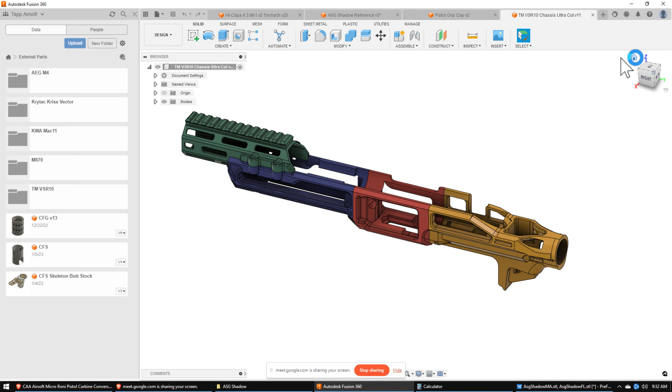Then we could sell a kit like this for $150 - there's really good margins, tons of potential. Yeah, and if you were working for us full time, we could just give you projects.

That sounds really good, and I could be more involved, maybe on a video call every day as well. We could set up live discussions, weekly calls or even every other day, whenever.

It would also be good to get our other team members on board - maybe create a WhatsApp group chat so you can talk with the other guys that are designing things.

I always love the company of designers because I'm very much into this. We've got one guy that does all the CNC work, and I'm pretty much modeling all these other things. Our friend Rayshawn works for us too, he's just really hands-on.

He's so good at creating video projects on your website - the painting guy, Cerakote, right? Rayshawn came up with this idea for a plate carrier that you don't even know he would be carrying.

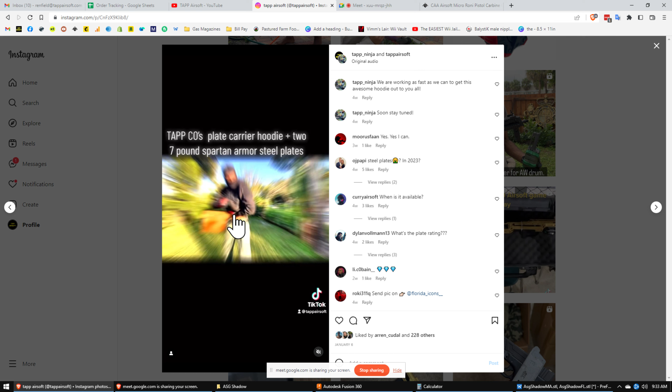He'll have a full steel plate underneath this hoodie, with full protection plates. And people are really comfortable as well, because he's jumping around and stuff. People are just going crazy for it.

He does a lot of our YouTube videos, like a lot of our custom guns he's now building, so now I can focus more. The production quality of your videos is very high, they all look great, made straight for TikTok and Instagram.

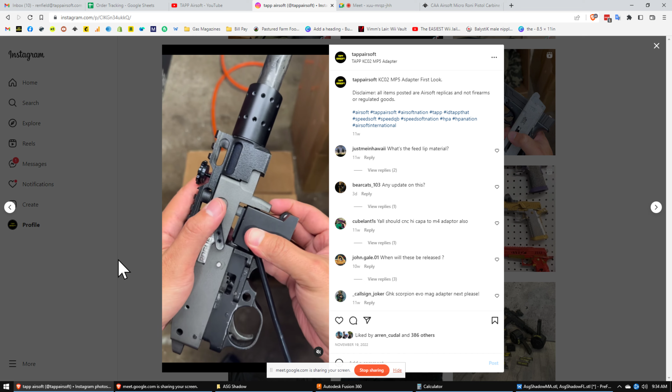A lot of these posts are old projects that I'm working on that I just don't have a lot of time to work on. Like this one here, I would like to start working on this project again, but I don't have time to really sit down and focus on all the little aspects that need to be fixed. But people are super interested, and this product here might cost us around $50-$60 to make, but we could sell it for $150.

And how much volume do you push out, do you have a number? That's a good question, I don't know that exactly, but that's your brother's department. I just make it, I don't sell it.

But we're the designers behind this thing. I think we try to get at least 5 or 6 adapters sold a day, that would be super nice. So you're getting at least 30 a month, let's say at least. I think even more than that.

The most popular one is, you really just have to look at the airsoft market and see what people are using. Right now people use this Hi-Capa the most, so this is our most sold one, the Hi-Capa modular adapter. That's why it's like on the top.

I actually didn't know anything about airsoft, but I've been getting very interested in these things. So it would be here, Hi-Capa, it's a separate tab. So we sell all of our adapters, all of our slides. Here's like little accessory pieces that go for it, our grips, and these things like you see here, the ones that cost $9.99 - I think they're also pretty, they have pretty good margins, right?

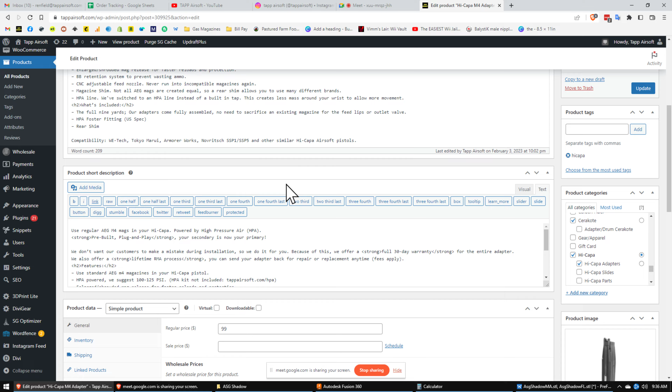This is where Renfield is doing a lot of the work, on the back end of the website, building the product. Renfield's your elder brother, I think - like, he's my twin brother. Yes, we started this business and we're running strong.

Mashallah, so we're not afraid to expand, we want to hire people, we want to get more partners. Getting comfortable at a single income source, or getting comfortable where you are right now, that's like the end of business. No, businessmen shouldn't settle, you always have to keep growing, settling is not an option.

And so here's all of the orders that are coming in. How soon can you ship these out, like do you use standard shipping? We actually have a process set up on our website, so when someone makes a purchase for something that's 3D printed, we'll send them an email.

Thank you for your purchase, your adapter's okay, it's 3D printed, we'll have it shipped out in 1 to 2 or 2 to 3 days. What we do is the order comes in, I see all the 3D printed ones, get all the models, pack it up, throw it into the printer, and then the next day we clean it, spray it, assemble it, and ship it. That's what we're trying to do.

Right now we're still getting the ball rolling. There's a couple things that we 3D print, and there's a couple things that are full, like our old product.

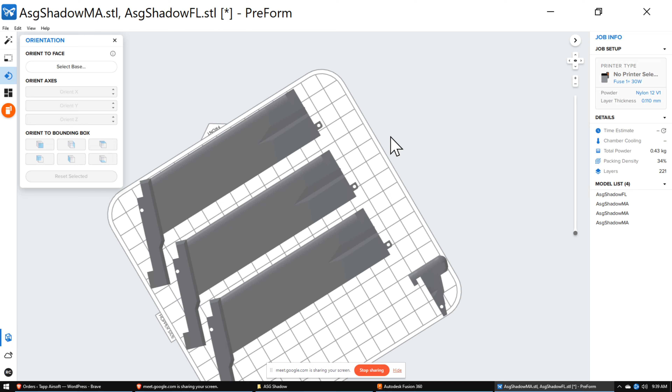He's like, oh, you could just have Khushal do that? I'm like, Khushal could model that? Yeah, he could, but he just doesn't yet, because he has other responsibilities. I told him, you're very busy with other things, you've got a wedding coming up, and honestly that's what's making me so busy as well. Most of the time I'm also a lecturer at my university, so grading students' assignments and things like that takes a lot of time.

If I could get on board with you guys, then I could just let that go and just work for you, work from home. That would be more efficient and faster. Yes, I agree completely.

I don't know if you want to review one of those. Just review this call and how the adapters are made, and then what I can do is send you a step file of something like this, and something else that hasn't been made yet, and then maybe you can just give it a go. It doesn't have to be perfect, just to show that you know the concepts. I'll have this recording for reference, and I'm gonna upload this recording right now and send it.

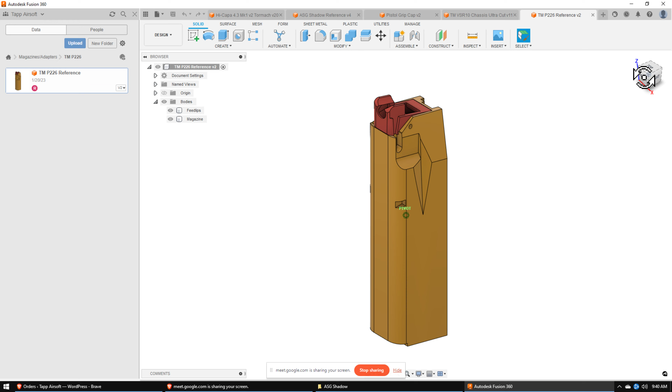Here's a good one, I think this is the first one that you've ever made for us, TM P226, and it's ready to go. I can review that one first, and then I can hop on this one.

This sounds great. Whenever you want, no rush, but I'm going to send you this one that we made, and I'm going to send you this one, and then I'll send you all the other parts that you need, and then you can just try putting it together, see how it goes. Like upload a new folder.